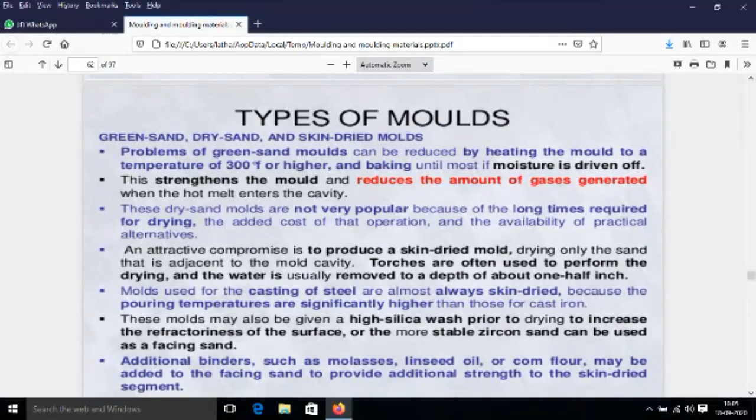A compromise is to produce skin dried mold, drying only the sand adjacent to the mold cavity. Torches are often used to perform the drying, and the moisture is usually removed to a depth of about half an inch.

Molds used for casting steel are almost always skin dried because the pouring temperature is significantly higher than that of cast iron.

These molds may also be given a high silica wash prior to drying to increase the refractoriness of the surfaces, or a more stable zircon sand can be used as a facing sand.

Additional binders such as molasses, linseed oil, or corn flour may be added to the facing sand to provide additional strength to the skin dried segments.

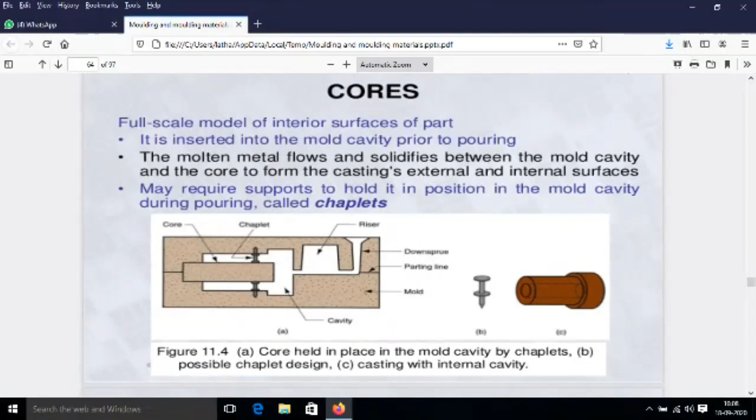Core parts: a core consists of two portions, the body of the core and one or more extensions called prints. The body of the core is surrounded by molten metal during the casting process.

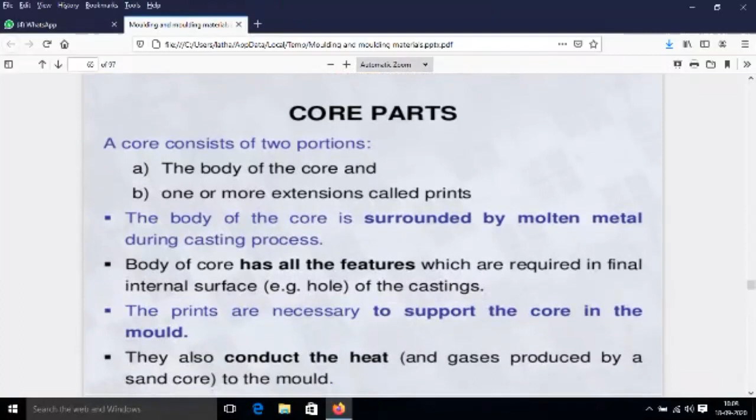The body of the core has the features which are required in the final internal shape of the castings. The prints are necessary to support the core in the mold. They also conduct the heat and gases produced by the sand core to the mold.

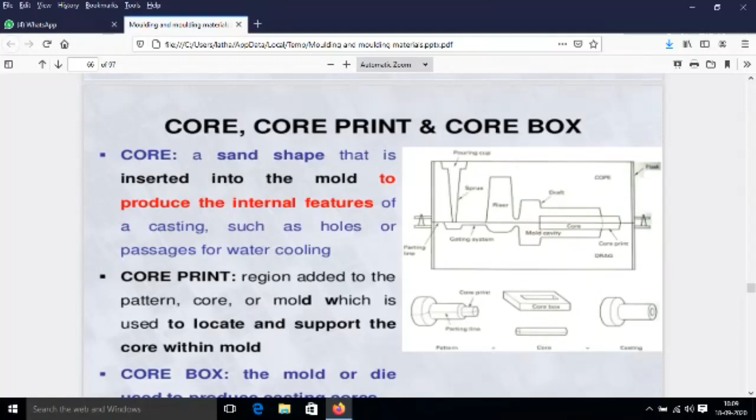Core box: the mold or die used to produce casting cores.

Essential characteristics of the core sand: a good core must possess high permeability to allow easy escape of gases formed, high refractoriness to withstand the high temperature of the molten metal, and a smooth surface.

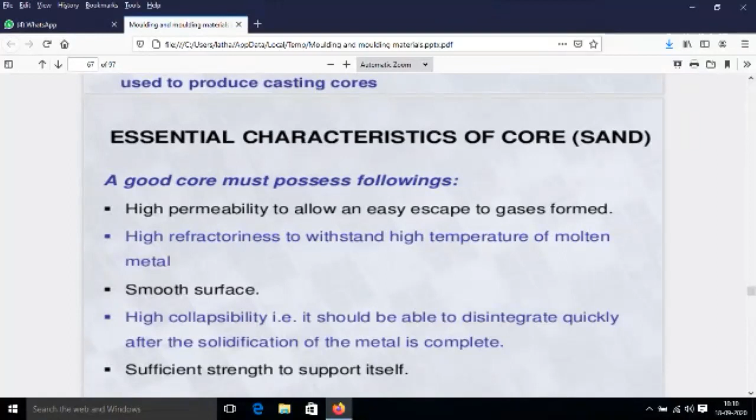High collapsibility, that is, it should be able to disintegrate quickly after the solidification of the metal is completed, and sufficient strength to support itself. The core must have all these properties, along with the functions of the core.

Cores are required to form internal cavities. Cores are used to form part of green sand molds. Cores are used to strengthen the molds. Cores are used as part of the gating systems.

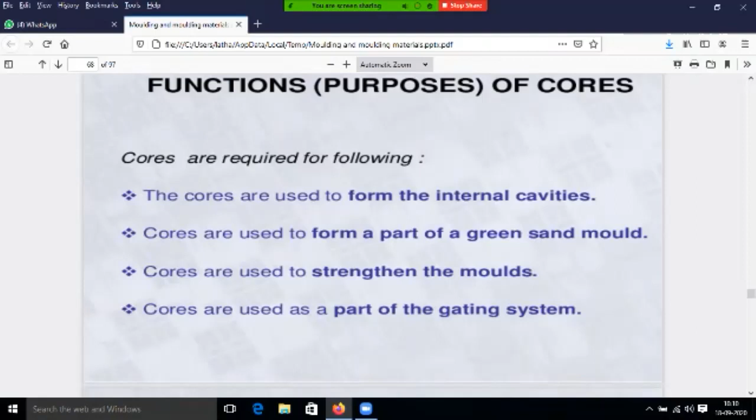The desired characteristics of a core: cores are the materials used for making cavities and internal features which cannot be produced by the pattern alone. Cores are generally made of sand and are even used in permanent molds.

In general, cores are surrounded on all sides by the melt and are therefore subjected to much more severe thermal and mechanical conditions. Core sand should have higher strength than molding sand. Following are the desired characteristics for a core.

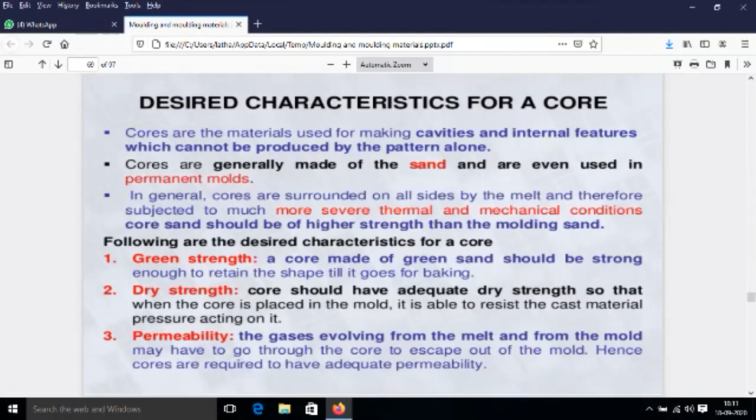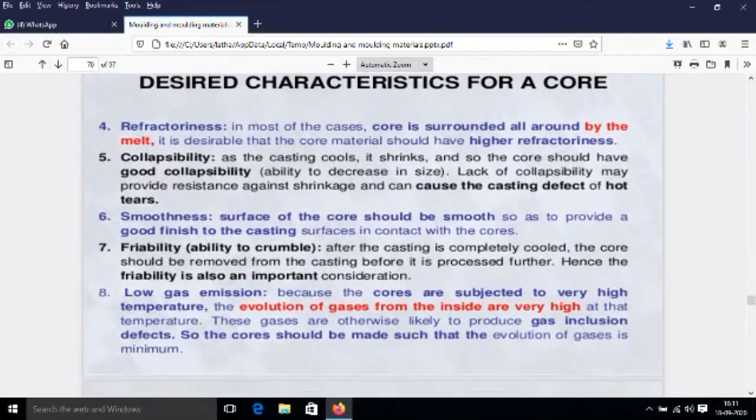Silica sand which is completely devoid of clay, generally used for making core sand. Coarse silica, because of higher refractoriness, is used in steel foundries. Finer sands are used for cast irons and non-ferrous metal alloys.

Binders: since clay is not enough in the molding sand, organic binders are used. Generally used binders are linseed oil, core oil, resins, dextrin, molasses, etc.

Core oil is a mixture of linseed oil, soya, fish and petroleum oils, and coal tar. The binders are burnt away by the heat of the melt, and this gives the core collapsibility during the cooling of the casting. When the core binders burn away, the core becomes collapsible.

The amount of binder required depends upon the grain shape, grain size, and the fineness of the sand grains. The amount of clay left in the sand increases the consumption of the binder.

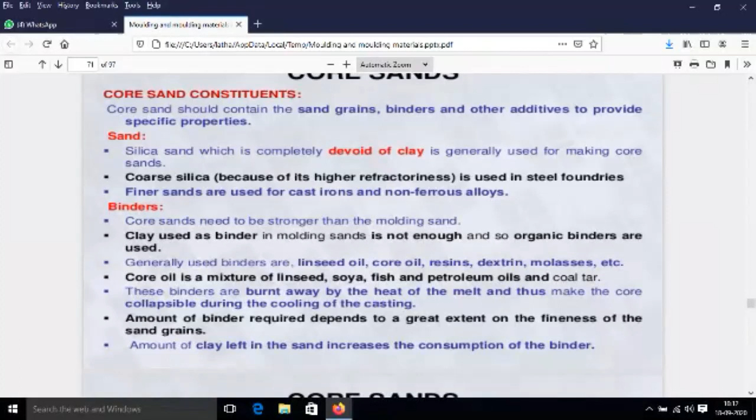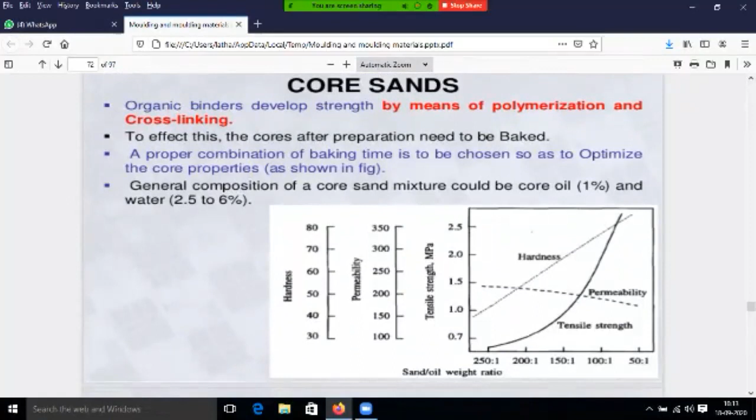Classification of cores based on the material: sand core, metal core. Based on the nature: dispensable core, permanent core. Based on the shapes and positions: horizontal core, vertical core, balanced core, hanging or cover core, drop core, ram up core, kiss core.

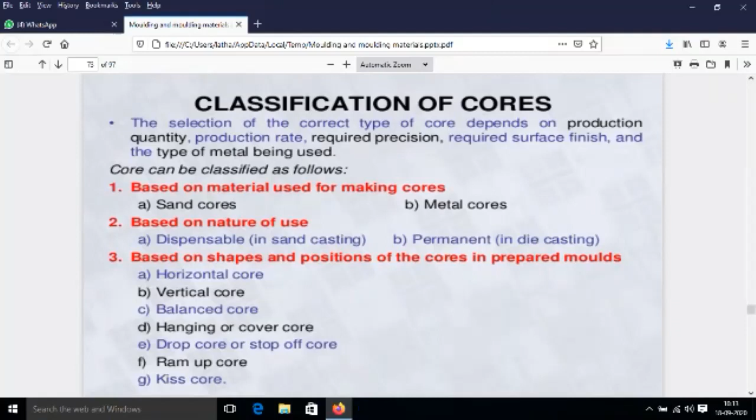Sand cores are made from materials similar to those used for chemically bonded sand molds. These cores are formed in core boxes similar to the pattern boxes used for making molds. Sand cores are chemically bonded sand of complex shapes and are used in all mold types.

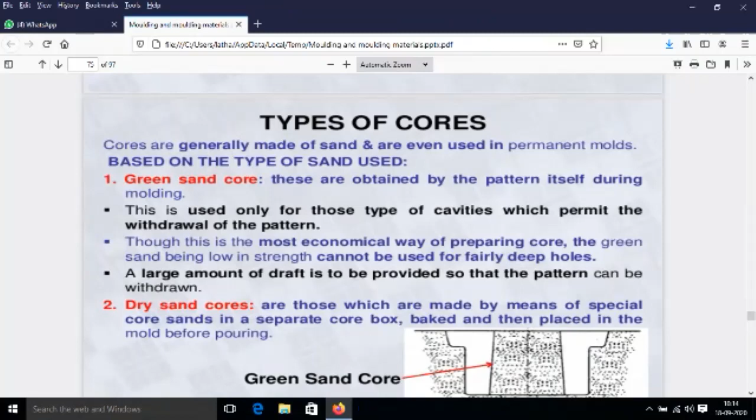These are used only for those types of cavities which permit the withdrawal of the pattern. Types of cores: horizontal cores, the most common type, usually in a cylindrical form laid horizontally in the mold. End of the core rests in the seats provided by the core prints on the pattern.

Horizontal core may be made in one piece using split core boxes, or in two half cores using a half core box.

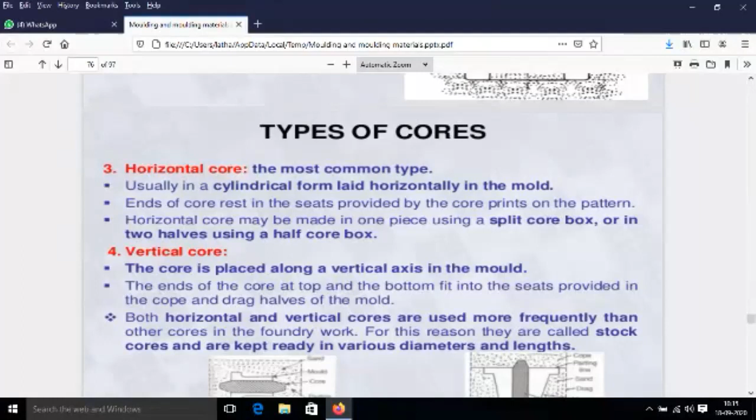Vertical core: the core is placed along the vertical axis in the mold. The ends of the core are at the top and the bottom, provided in the cope and drag halves of the mold. Both horizontal and vertical cores are used most frequently than other cores in foundry work.

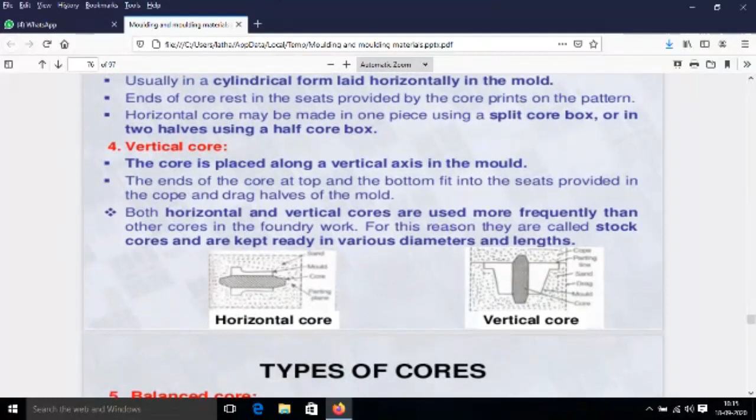Core print is such a case, sufficiently large to support the weight of the core which extends into the mold cavity, and it should withstand the force of buoyancy of the metal surrounding it.

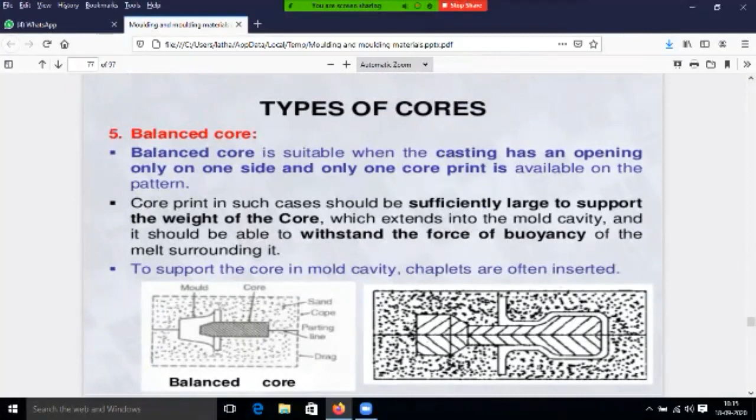To support the core in the mold cavity, chaplets are usually used inside so that the core remains balanced.

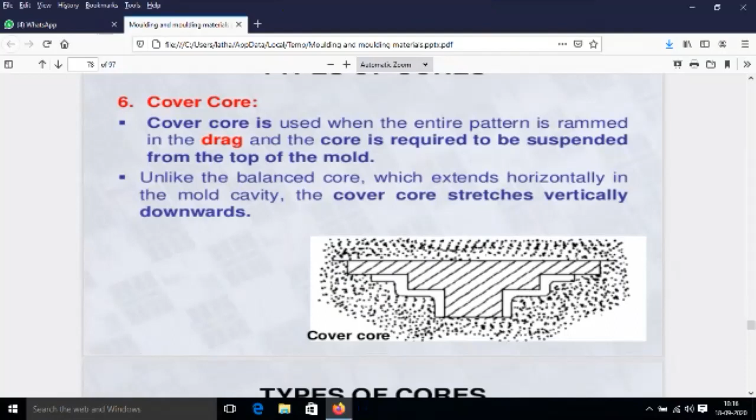Types of cores: hanging core. The core hangs from the cope and does not have any support at the bottom in the drag. It refers to a hanging core.

In this case, it is necessary to fasten the core with a pin or a rod, with a wire or rod which extends to the cope for fastening at the top side.

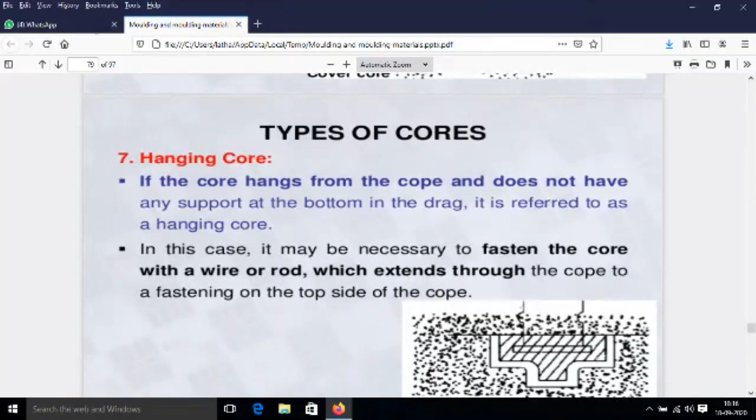The wing core is used for a hole or recess to obtain in the casting either below or above the parting line. Wing core is necessitated where it is not possible to place the pattern in the mold such that the recess can be cored directly with or other types of cores.

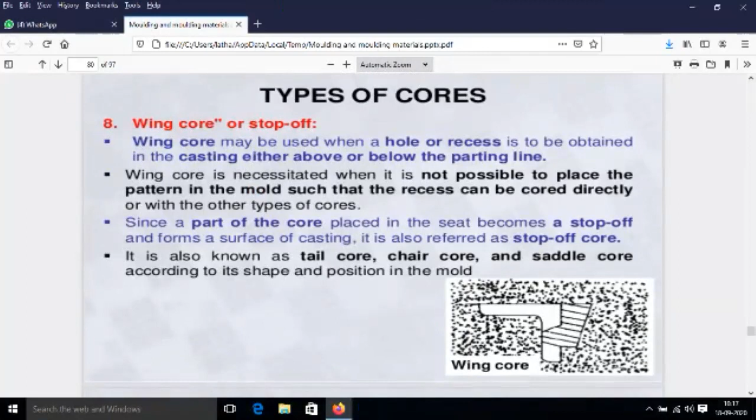Since a part of a core placed in the seat becomes a stop-off and forms the surface of the casting, it is also referred as stop-off core. It is also known as tail core, chair core, and saddle core according to the shape and position of the mold.

Types of cores - another one is ram up core. Ram up core means sometimes the core is set to the pattern in the mold before the mold is rammed. Such a core is called a ram up core. It is favored when the core detail is located in an inaccessible position. It may be used for both interior and exterior portions of the casting.

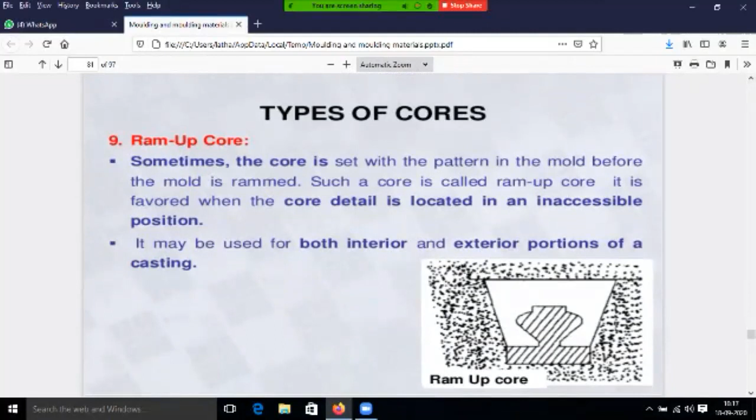Kiss core - when the pattern is not provided with core prints and no seat is available for resting the core, the core is held in position between the cope and drag. This is called a kiss core, held simply by the pressure of the cope. Depending on the cope's pressure, the core stays in place.

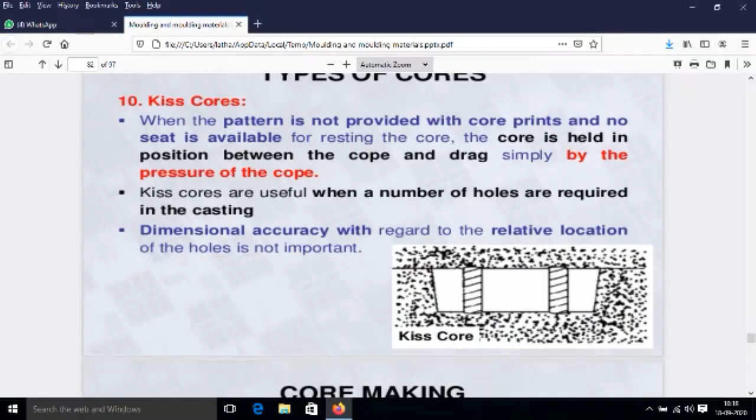Kiss cores are usually used when a number of holes are required in the casting. Dimensional accuracy with regard to the relative location of the holes is not important.

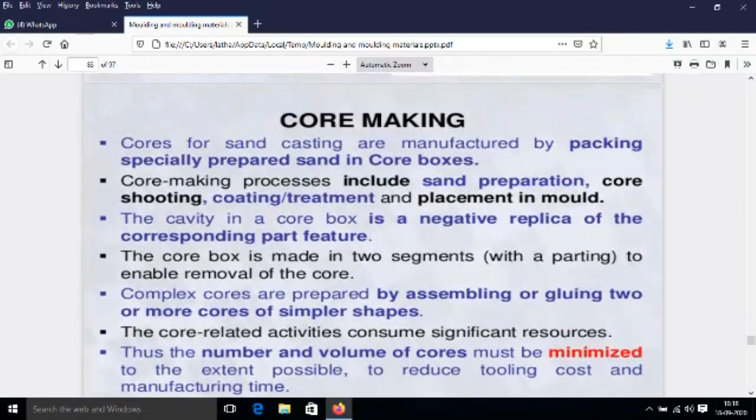How is core making done? Cores for sand casting are manufactured by packing specially prepared sand in the core boxes. Core making process includes sand preparation, core shooting, coating treatment, and placement in the mold. The cavity in the core box is a negative replica of the corresponding part feature. The core box is made into two segments with a parting to enable removal of the core.

Complex cores are prepared by assembling or gluing two or more cores of simpler shapes. Core-related activities consume significant resources. Thus, the number and volume of cores must be minimized to the extent possible to reduce tooling cost and manufacturing time.

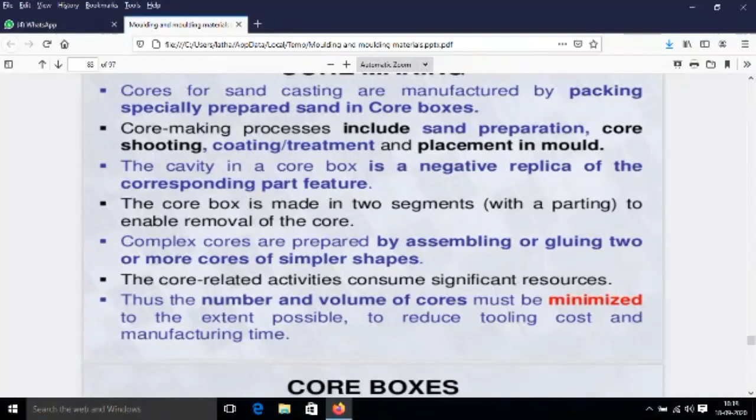Core boxes are used for making cores. A core box is a wooden or metallic type of pattern, made either as a single piece or in parts. They are classified according to the method of making the core or the shape of the core. The common types of core boxes are described below.

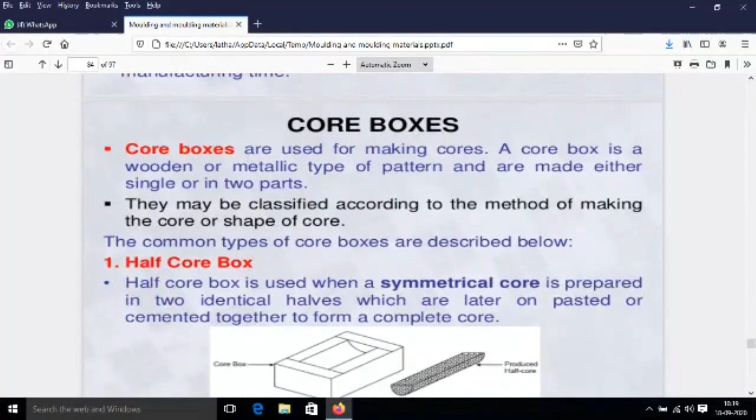Half core box is used when a symmetrical core is prepared in two identical halves which are pasted and cemented together to form a complete core. This is the half core box - you produce the half core you need, cement it together, and it forms the required pattern.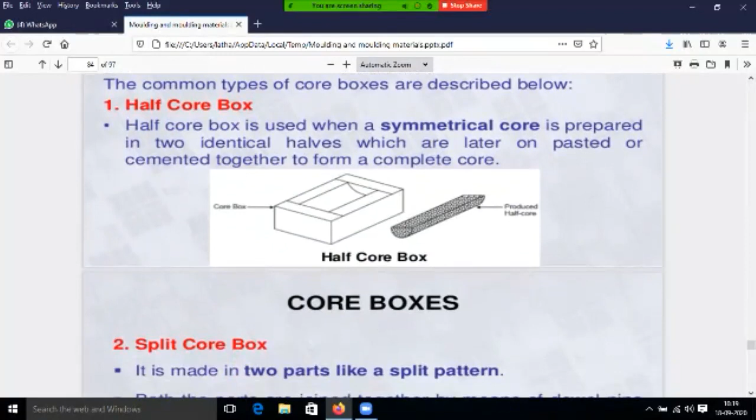This is called a split core box. It is made of two parts like a split pattern. Both the parts are joined together by means of dowel pins to form the complete hollow cavity for making the core, as shown in the figure.

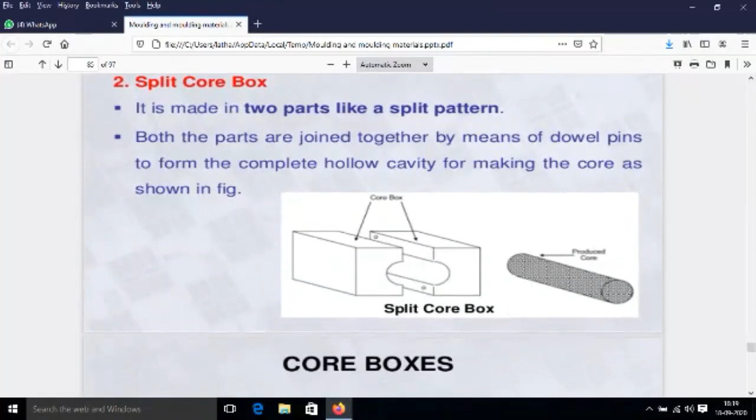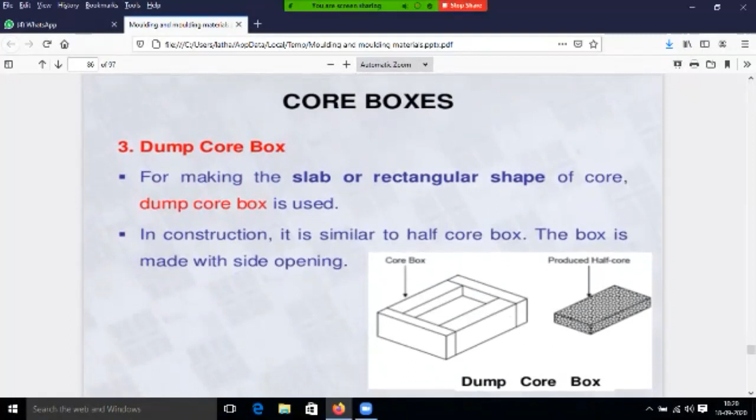This is the core box. Dump core box - it looks like this. For a slab or rectangular shape, a dump core box is used. In construction, it is similar to a half core box. The box is made with a side opening.

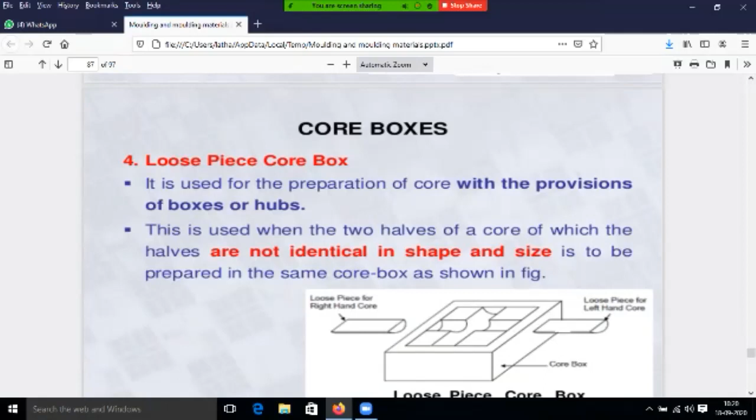That's a loose piece core box. It is used for the preparation of a core with provisions of bosses or hubs. These are used when the two halves of the core are not identical in shape and size - it is to be prepared in the same core box as shown in the figure.

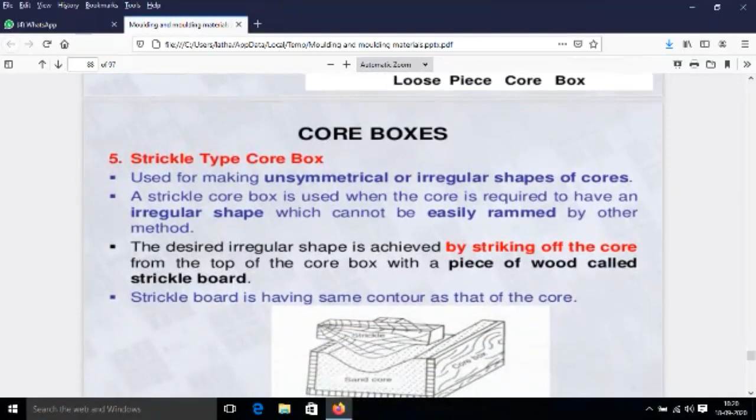That's a strickle type core box, used for making unsymmetrical or irregular shapes of cores. A strickle core box is used when the core is required to have an irregular shape which cannot be rammed easily by other methods. The desired irregular shape is achieved by strickling the core from the top of the core box with a piece of wood called a strickle board. The strickle board has the same contour as the core.

Core prints - these are provided so that cores are securely and correctly positioned in the mold cavity. Design of core prints takes care of the weight of the core before pouring, and the upward metallostatic pressure of the melt. After pouring, the core print should ensure that the core is not shifted during the entry of the melt into the mold cavity.

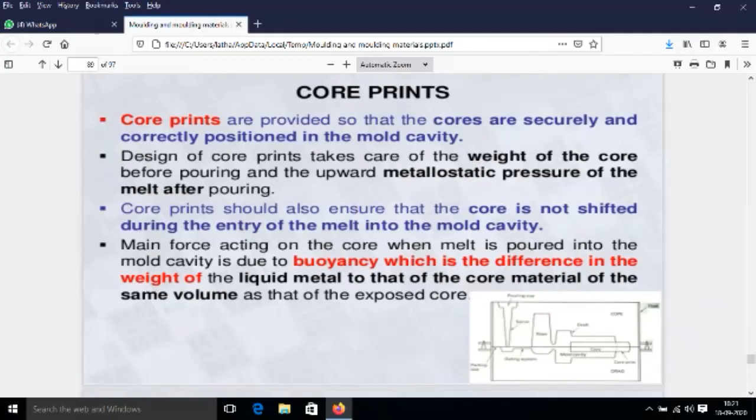The main force acting on the core when melt is poured into the mold cavity is due to buoyancy, the difference in weight of the liquid metal and the core material of the same volume, assuming it is an exposed core. So this is the design of core prints - called core prints design.

Core prints should be able to take care of the weight of the core before pouring and the upward metallostatic pressure of the molten metal. After pouring, the core print should ensure that it is not shifted during the entry of the metal into the mold cavity.